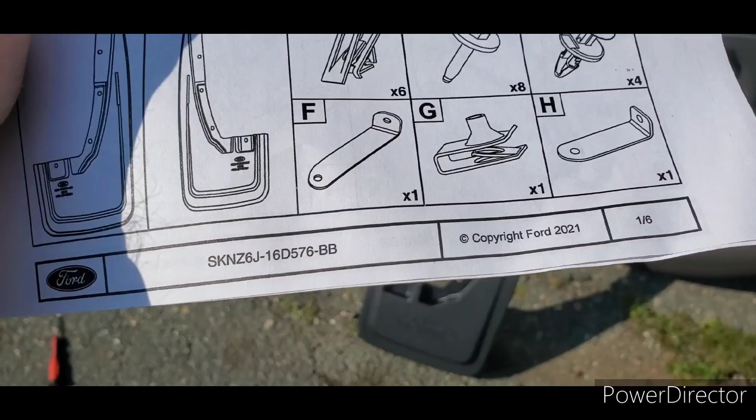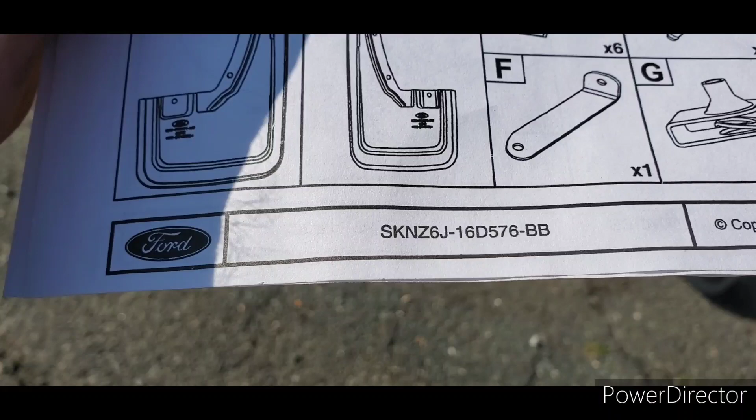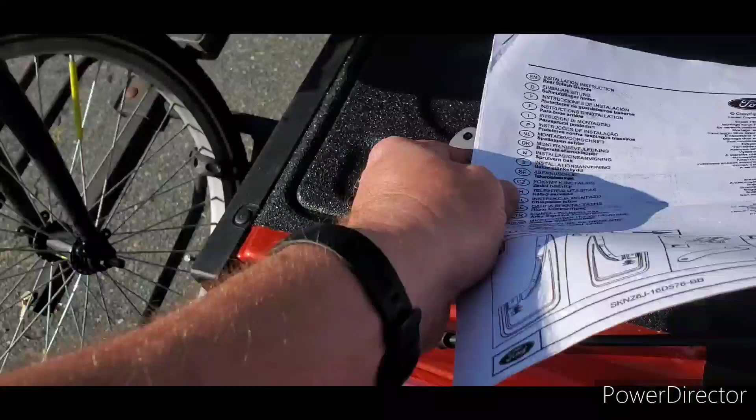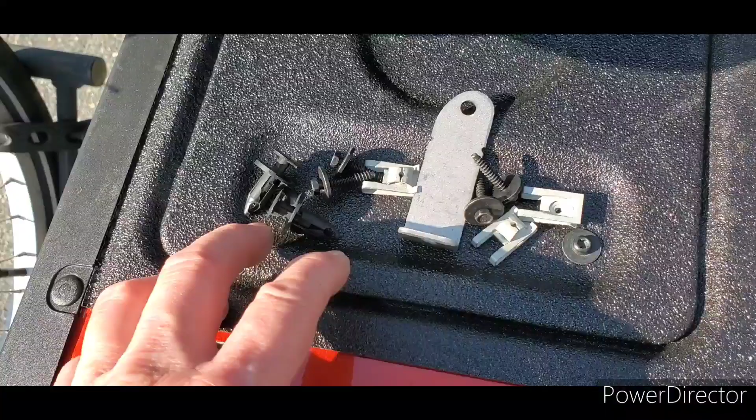Now I'm going to show how the rear mud flap goes on a 2023 Ford Maverick. These are the ones that on the bag say AB or BA at the end of the number, even though the instructions say BB on them for whatever reason. If you've watched the video on how I do the front ones, these are a little more complicated, and I have my own modification because Ford has you putting in some plastic anchor plugs when you could have some screws instead, which I think is better.

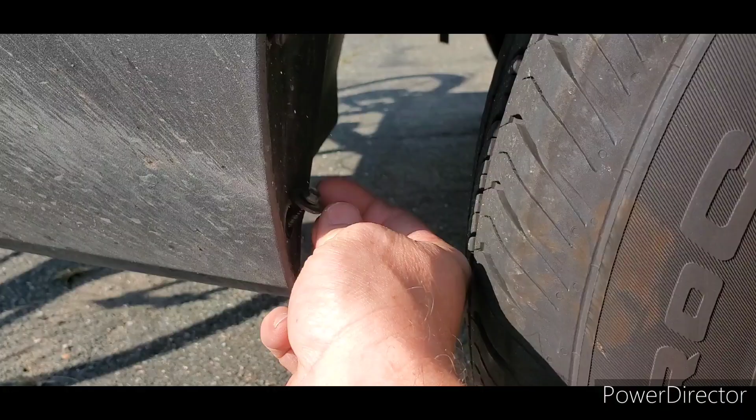The first thing they have you do is go right up inside here. There are two screws right behind the wheel, going to the bottom, and we have to remove them. I've already loosened them with the ratchet. These are 7mm bolts, so hold on to them because they're going to be useful. Two 7mm bolts, we'll pop those out.

We also have some plastic plugs that they use for holding the fender liner in. Just get a little gap under the head, pry it out, and then you can grab them and pull them right out. That's the type of thing they are. Now they say to throw these away, but if you're a good mechanic, you'll save them for some other project or idea later on.

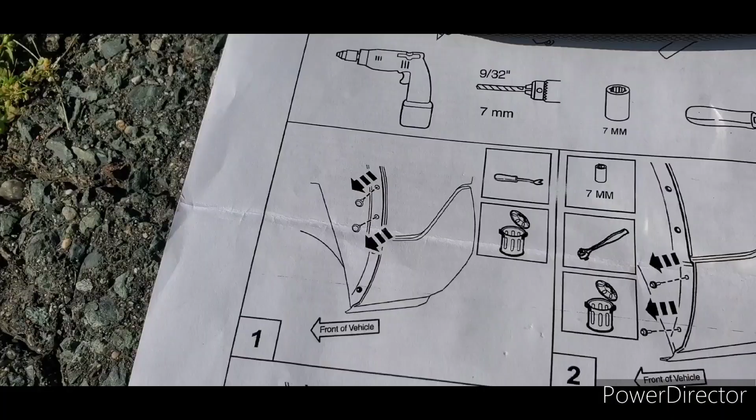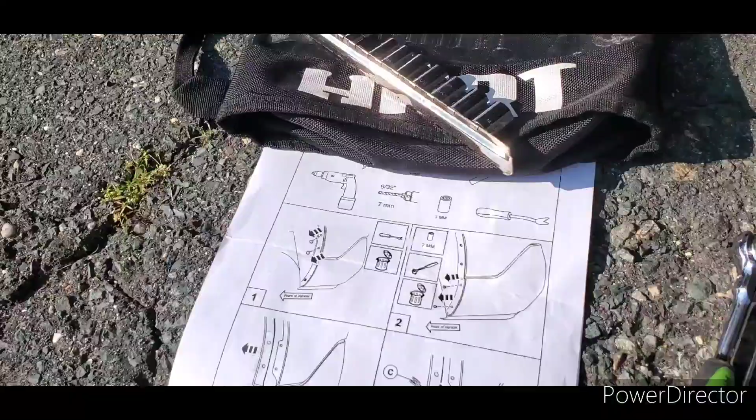I just showed those two steps, but next they show you separating the fender liner, pulling it back away from the body. Then they give you two clips like these and want you, according to the picture, to put them down here. That doesn't make sense because Ford already, if you pry this fender liner back and pry this part back, already put some right there, so there's no need to replace those.

So what I think is the best idea is to take these and put them on the body part up here so you can screw the top of the mud flap in, since you're already going to have the bottom with nut plates that you don't need to add. Put those two right there, and they line up to match the holes in the fender liner already, so our screws have something to go into.

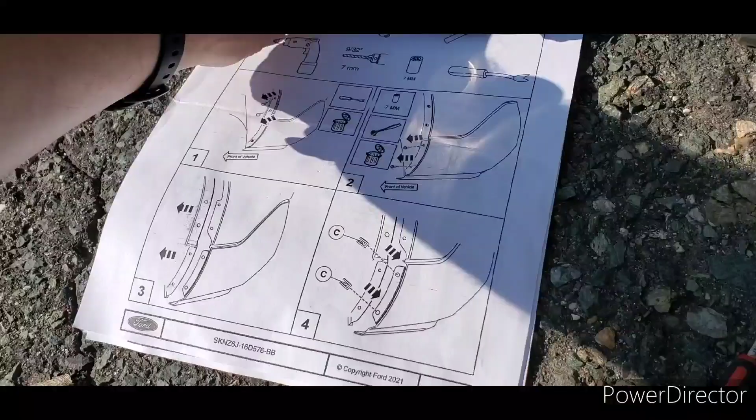I'll go to the next page. Now they show you, of course, to put the fender liner back. So boom, that's it, pretty easy.

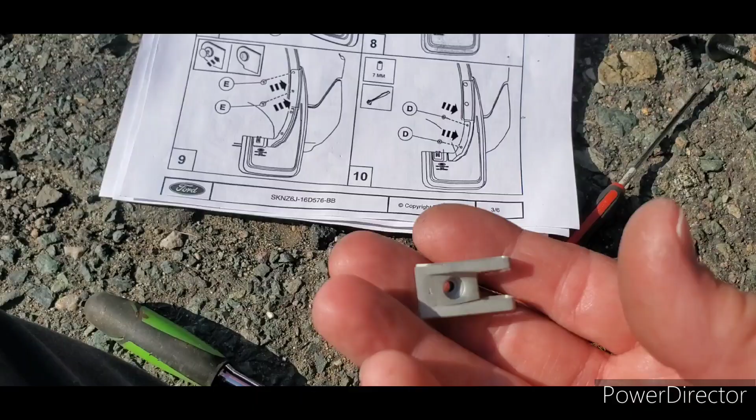Then they show you adding this other smaller clip, another one they give you, to this part right here on the mud flap. This is going to sit like so on the vehicle, and the way they show it doesn't make sense to me because you're going to end up with a bolt sticking through here towards your tire, which is not a direction I would do.

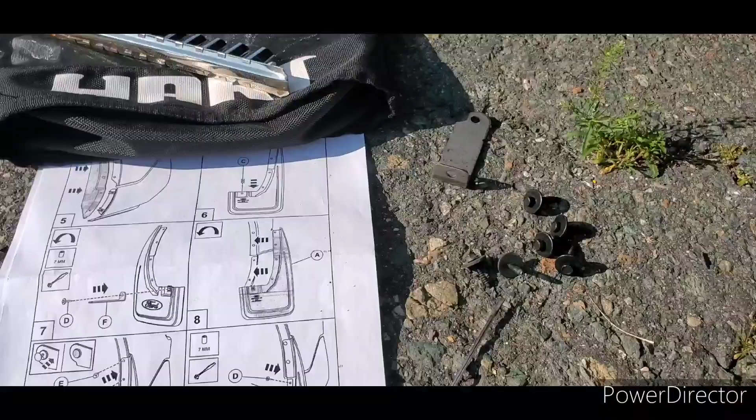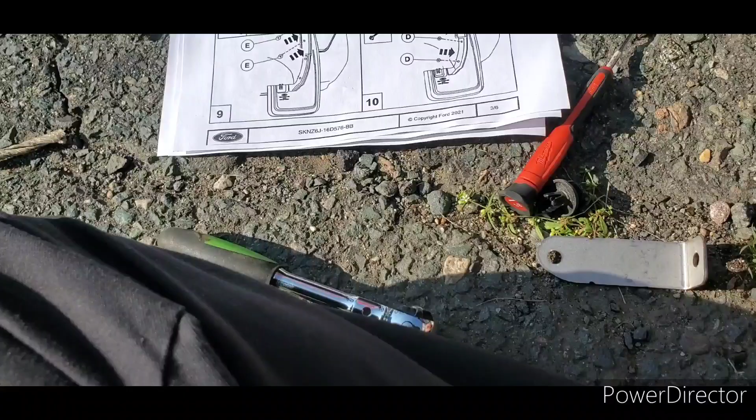So what I'd recommend instead is they give you a metal standoff, and you're going to need this in a minute. You have to figure out which way it goes up or down — this is the passenger side, which has a much more direct setup. On the other side, which I'll show you in a minute, I put the clip like this on this metal standoff bracket.

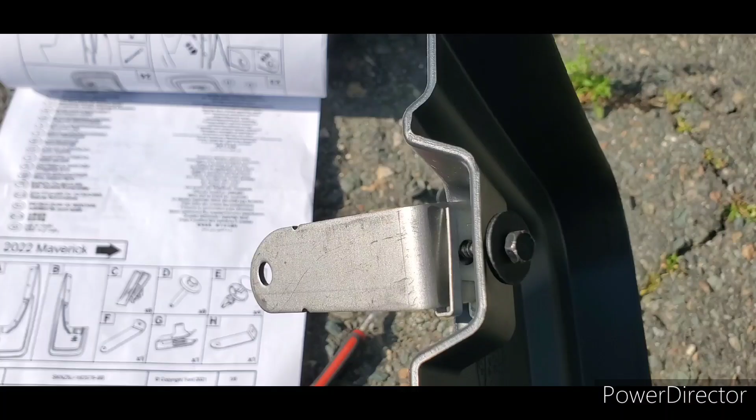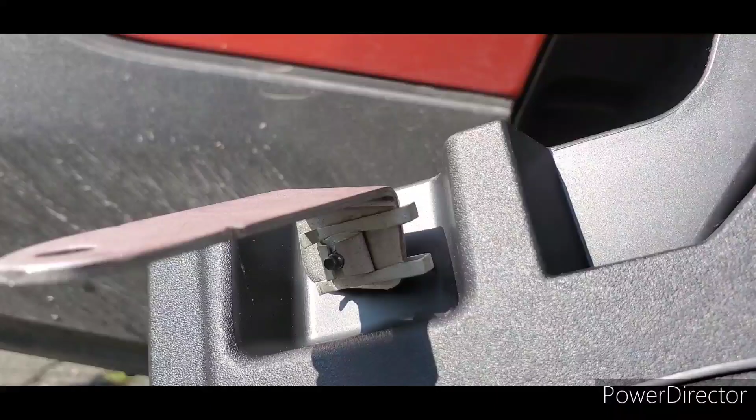I'll show you why in one second. The bolt head goes through the mud flap into the standoff piece you need here on the inside, like that. That way, the stem or tip of the bolt goes to an area where you don't have to worry about it touching your tires, and it actually makes more sense. I don't know what whoever put this together at Ford was thinking, because I would not put the screw the other way, facing forward toward my tire.

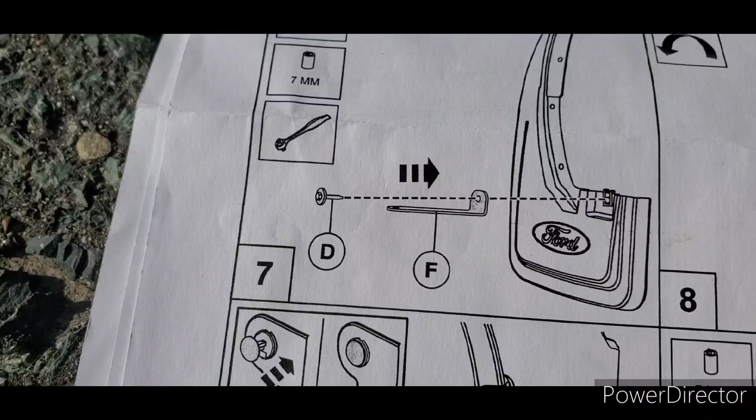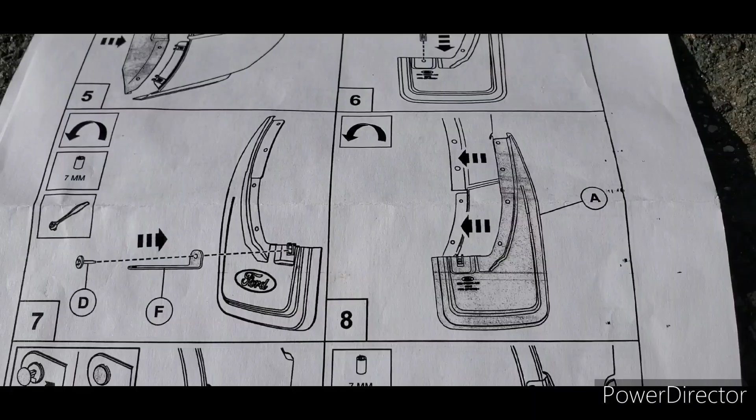You can see what I'm talking about right there. They want the head of the screw facing aft, going through the mud flap, so the point of the bolt ends up facing your tire, which is just a dumb installation if you ask me. So we're flipping that around, and then, of course, we're going to put the mud flap up to the vehicle, like so.

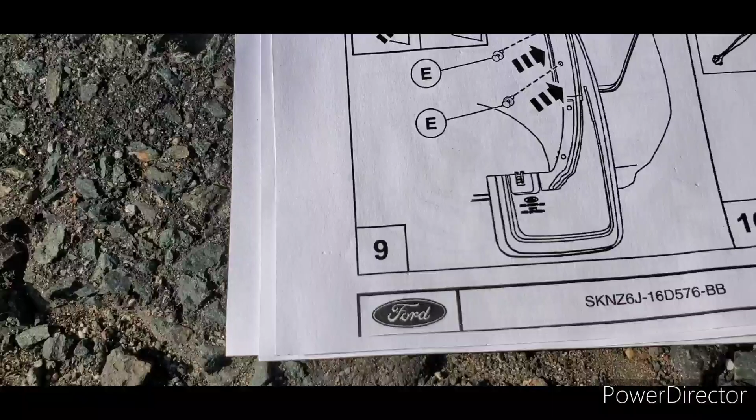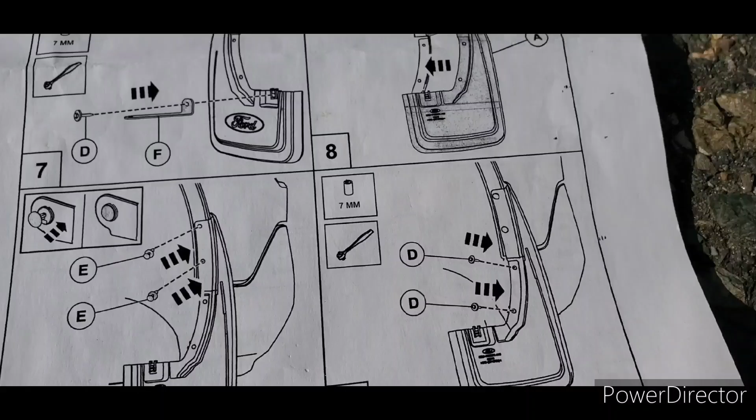There it is. That's the way it's going to be mounted. They want us to use those plastic plugs they supplied. However, if you do the nut plates the way I do, and you don't remove the ones that were already installed at the factory, you can reuse the 2 bolts that you pulled out from the bottom up on the top, since they have plenty of grip length, even though they are slightly shorter.

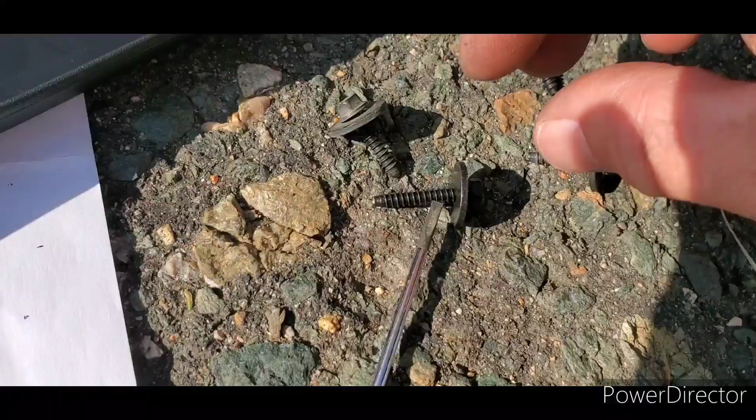I'll show you the difference in length here. Slightly shorter, very, very slightly, than the ones that came with the kit, like that. But I'm going to take these 2 shorter ones, and we're going to install them in these upper holes up here on the mud flap, since they have plenty of length.

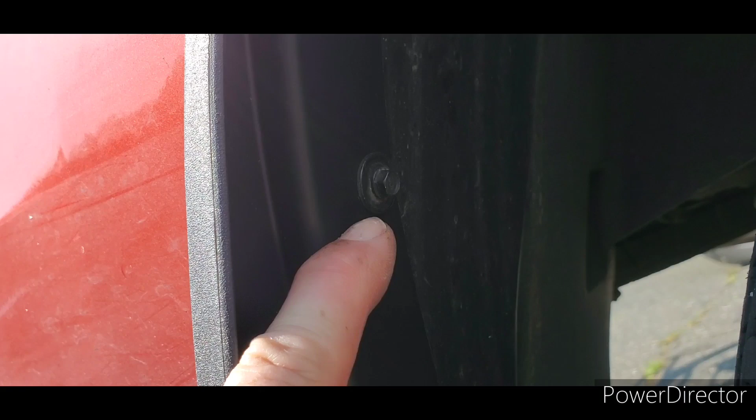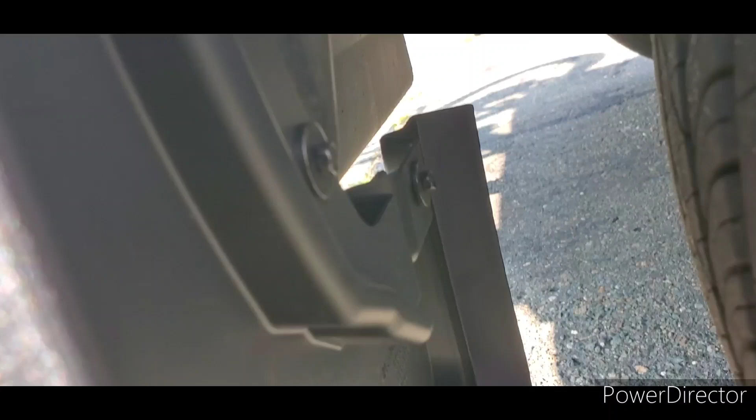So there's the upper one, and lower one's right here. Sorry about the light. There we go. Now you can see it's there. So those are the 2 that were down here, and now down here we have extra layers of plastic, so we'll use the longer ones that are supplied with the kit. So there's the lower one and the upper one. There's the 2 we removed.

There's the one over here going to the link, which is going to bolt right onto the structure of the vehicle here, and I think we'll have an extra bolt, but we'll find out in a second. So go ahead and tighten up the bolts, and what I really recommend is up here on the top edge, pull out your mud flap as much as possible so that this edge is not wearing on the paint as it flexes before you tighten that bolt all the way down.

As soon as you start to feel some tension, give this a good hard tug so that it has a little bit of a gap there. You might think it looks goofy, and you can if you want. I'm saying how I'm going to do it.

But this way, it shouldn't rub on the paint, and I also might even recommend getting some of that anti-chafe tape like 3M makes. It's adhesive, and we just stick it right underneath that edge to also keep from wearing any of this extremely thin paint that Ford is using on the Maverick away, so that you don't get a nice line of rust right there.

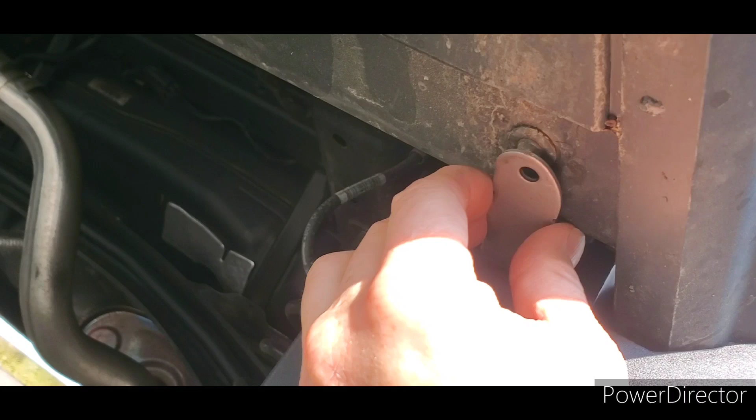Alright, so with all 4 of those bolts tight from your top down to your bottom, now we have to work on that link back there. We have to go underneath to do that. Okay, so looking up underneath here, you can see that if we tighten up this bracket tight against the mud flap, we're going to end up right underneath the head of that bolt, which already has a nut plate as well.

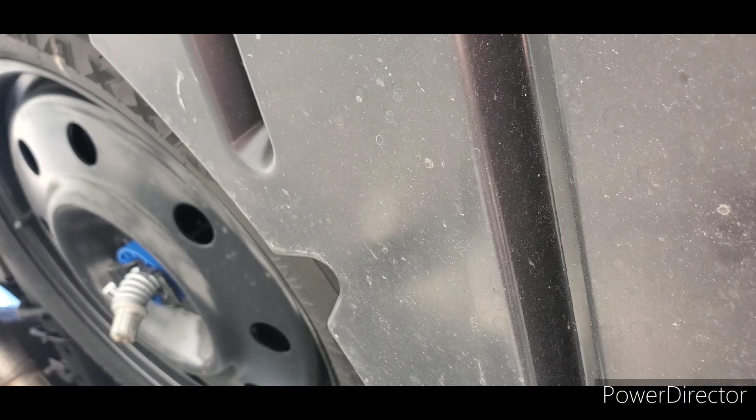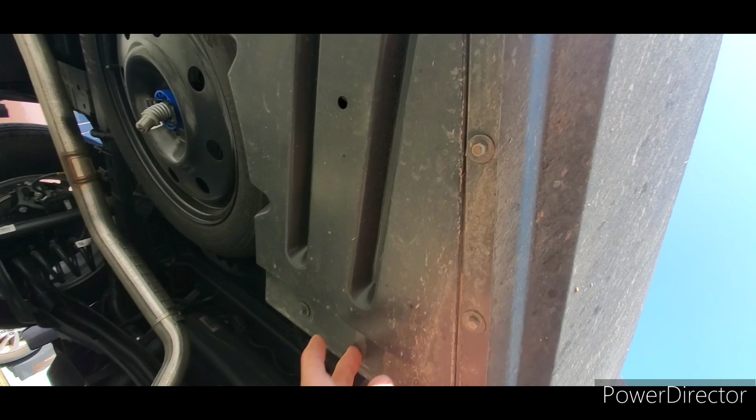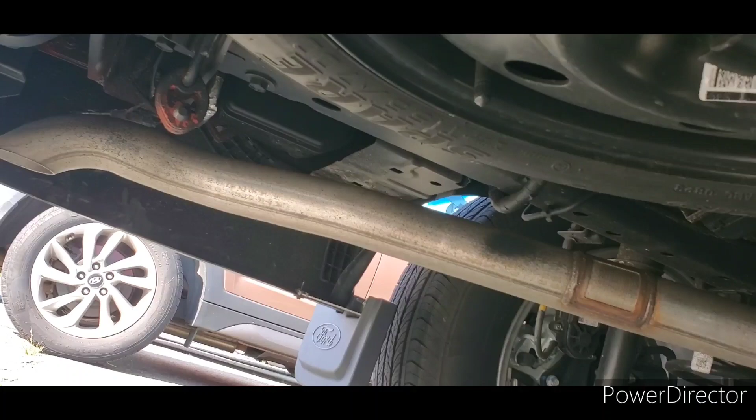Now this is an XLT, this is a hybrid, and the difference between driver and passenger is on the passenger side there is all of this plastic under here, under the rear end. I'm not even sure what it encloses, but it's boxed in pretty well, goes up to the frame there, and it makes this nice box. But on the driver's side, it's all wide open, so I want to cover up that metal piece, try and protect that from road salt so it doesn't get salt sitting on top of it and corrode away.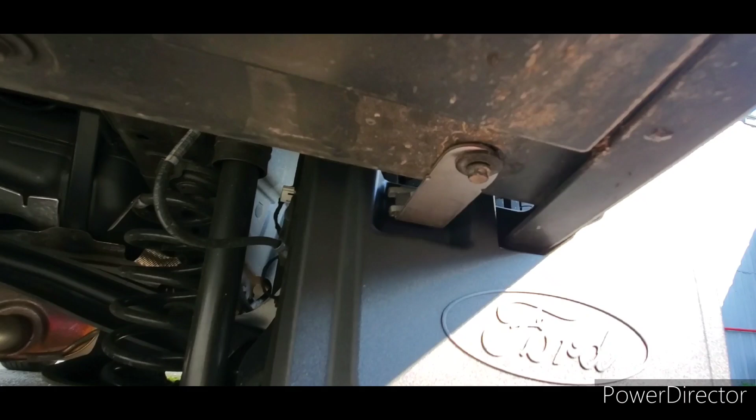Alright, so I have loosened that bolt, put it through the bracket, and started it finger tight just a little bit right now. And then I'm going to go around here and tighten the head that's on the mud flap on this side before I tighten this up, just so everything is lined up the way I want it.

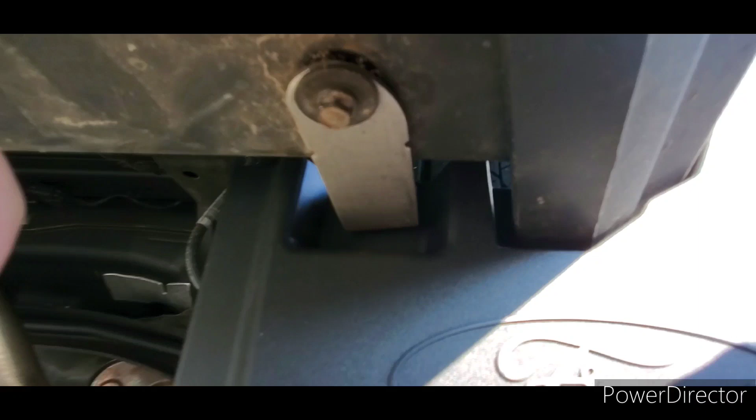So now I have this bolt tightened up on the mud flap the way I want, and once again not going the way Ford was showing. I think that's a stupid way. And I'm reusing the bolt that was in there. Ford probably would want me to use the extra bolt that they gave me, but I'll save that for something else. So tighten this one down now.

Okay, so we got one extra bolt, which is never a bad thing doing car repair. You never know when you could use it somewhere else. It's a standard size, it's a 7mm bolt. Mud flap is on. That little extra bracket on the inboard side keeps it nice and secure. It seems like a very nice, pretty rigid setup. I like the little Ford logo there. This is only on the rear ones. The front ones don't have that.

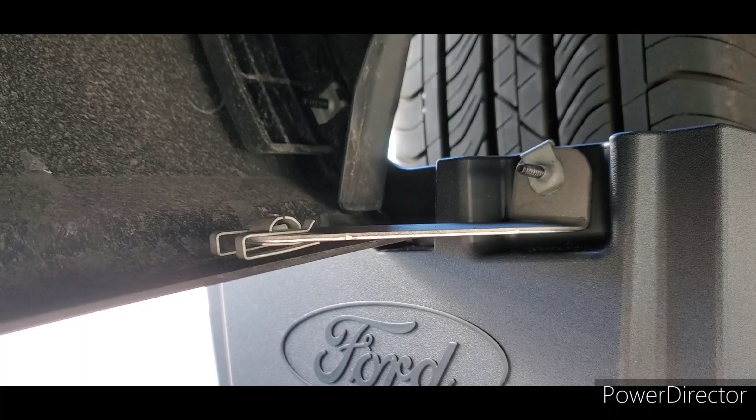And I showed you what happened on the other side there, and how it is a little different. I'm going to be adding a piece, and actually on the rear driver's side one, all you have to attach this to stabilize this inner corner is this plastic, and they give you this brace. Now they showed putting the nut plate on the mud flap. I'm putting it on the bracket, and I'm doing it on the bracket here as well.

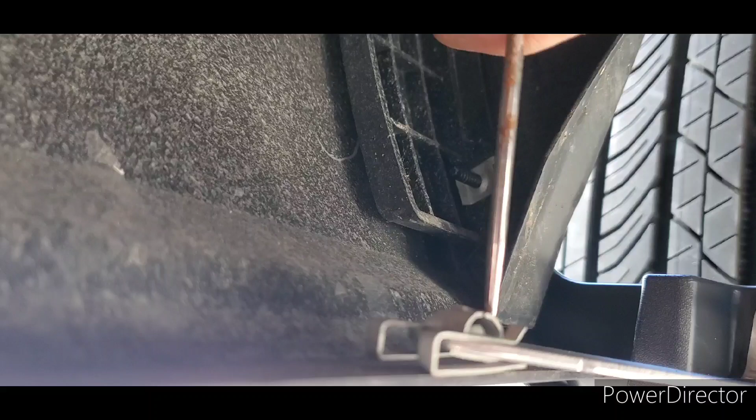And then what I'm going to do to locate the hole correctly is I just have an awl here, and put it right down through the back of the nut plate where I want it located, so that it has some meat to hold on to on this channel.

And then I'm going to punch it through the plastic right there, and that's how I know where my bolt will go. But I'm doing it towards the inside edge so that it has more meat to hold on to. So now you can see it's through the plastic, down through the nut plate right where I want it. I put a bolt through that, and it's going to hold it right through that.

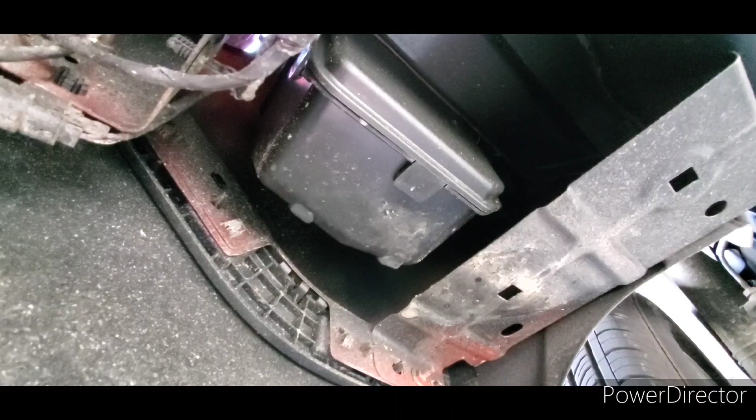So this right here, that bracket up there, is the one that I'm concerned about rusting out and leaving the bottom corner of the side of the truck flapping. That black plastic box right there is the little cargo cubby I added to my bed on the driver's side, and I wanted these to help protect that piece up there. And you'll notice Ford didn't really give me any protection. I'm probably actually going to get another sheet of vinyl, plastic, something fairly substantial like these mud flaps, and make a piece that covers that gap just to help with it.

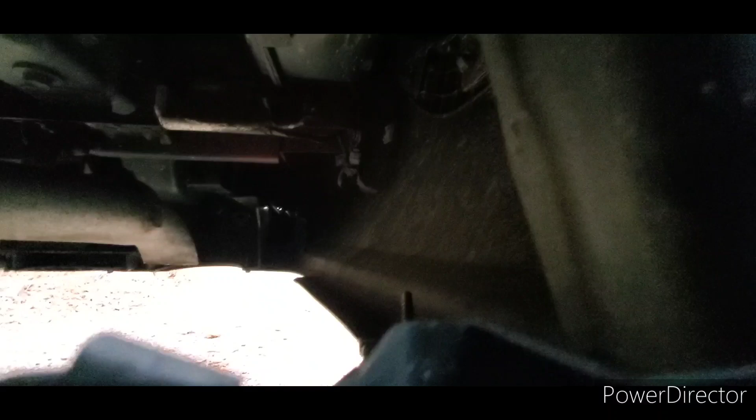So before I mentioned that really big gap on the left hand side, and why it really bugs me is if you look down underneath, you're looking right up inside the back of the bed there. That's a whole bunch of sheet metal that is going to get splattered but good with road salt and sand and whatever other gunk I drive through. And that is a major fail on the part of Ford, because these are Ford mud flaps. So I was like, you know what, I gotta come up with something better.

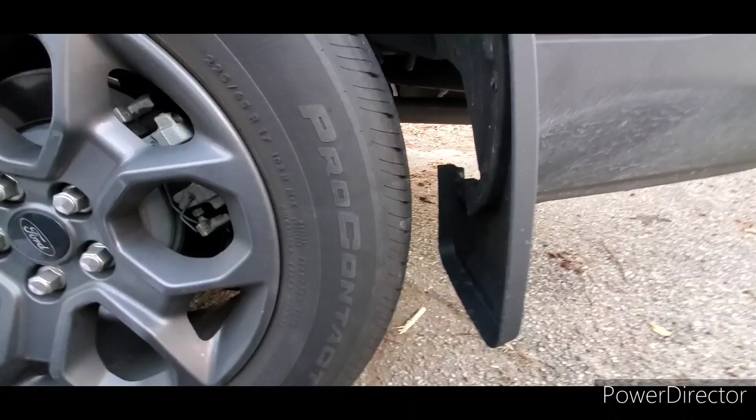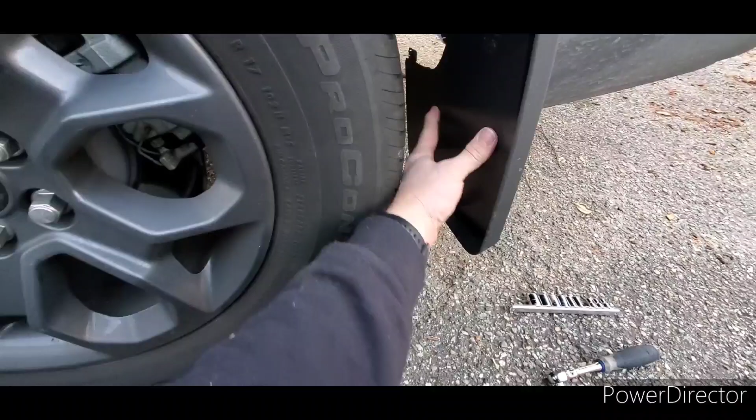So today I was in the store and I found these el cheapo, I think they cost me 20 bucks, mud flaps, which supposedly there's a whole list of vehicles they can fit, and what do you know, the Maverick is not on there. But funny thing about it, here's the one for this side, and literally it's covering the exact same amount of space. Like, I really could have saved my money and just mounted these there instead, and still had that ridiculous gap, but actually more covered than the Ford ones.

But what I'm going to do is take this and put it so that it completely covers that gap, so that whatever gets splattered is going against the wheel well liner, which is actually plastic in the back. In the front they're felt. It's a carryover from the Focus. But in the back here, they are actually plastic, which I think is even better.

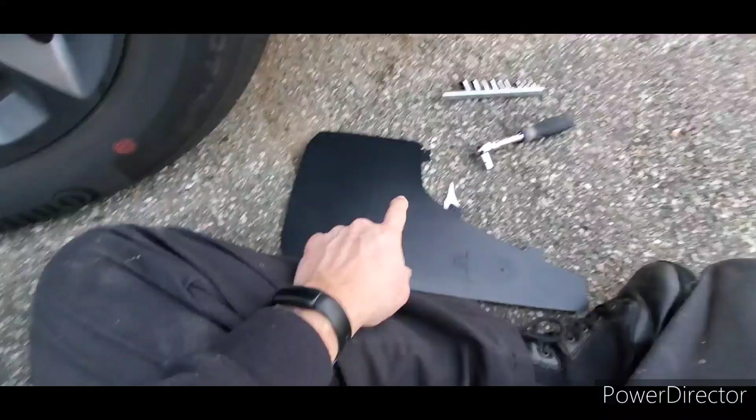And all I got to do is just simply match up the holes for the mounting hardware, drill through this, and just install this right over that, and it won't even really be obvious what I did. So the first thing I'm going to do is move the mud flap so that I can lay this piece over that piece and then drill through to match.

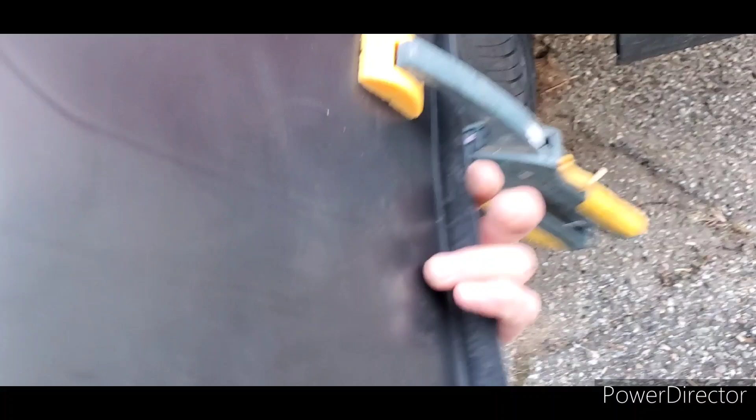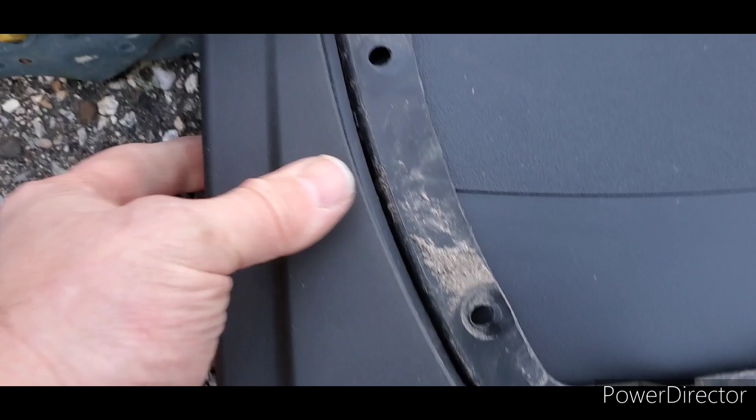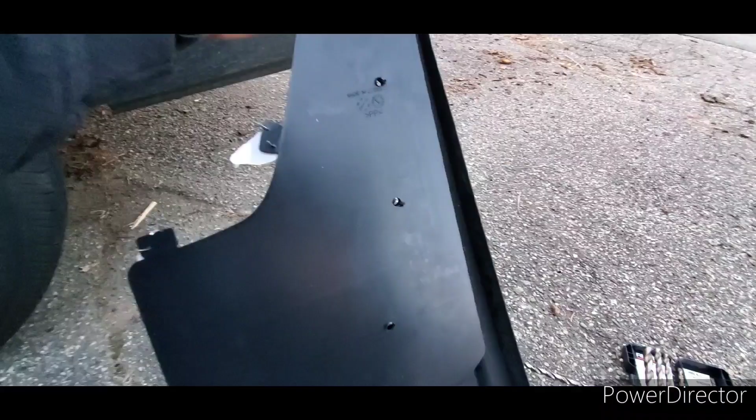All right, so that's the overlap I'm looking at, and I got it clamped, and basically that's going to cover everything that Ford didn't with their OEM. I got these with my FordPass points for buying my truck, but you want to line up this inside edge with that inside edge, and then it's just a matter of getting a drill and drilling through these holes to help you be able to locate everything when it goes back together. And so then with the holes all drilled through, put your first bolt in right there, line it up with the top nut plate, and set it all back together.

So there it is, and that big gap that was there now doesn't exist. And all it took was just a little bit of extra plastic. I like the coverage that this gives with the Ford one, but I didn't like that hole, and now it's gone. And as always, make sure you space this top edge out away from your paint so that it doesn't chafe into it from flexing with the air going down the highway or whatever, because otherwise it's gonna chew right through that paint.

So just a follow up showing how it looks with mud flaps, that I definitely think are worth it. Help protect the vehicle from road salt, rock, sand, anything that could get tracked up here. And there it is. I think it looks pretty nice, and I got it with my FordPass points, so it didn't really cost me anything. I love the way Ford kind of gives you a way to buy accessories for free after you buy your vehicle. Can't beat it.

Just checking to see how effective these mud flaps are. Raining this morning, drove in on wet roads. As you can see, the space right here behind them is dry. The same thing is true up here in the front, which means that's going to protect all this area from salt, sand, and rocks. That's exactly what I wanted.